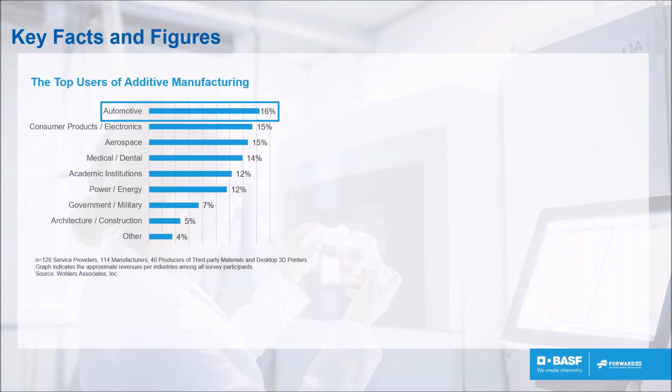So, a status report with some numbers. Let's start with this. You can see that based on the Wohlers report, the automotive industry is the top user of 3D printing. When you look at the right-hand side, you will directly understand why. The most fields of application for which additive manufacturing is suitable can be found in the automotive industry. So you have prototypes, proof of concept models, production aids like jigs and fixtures, but also mass production like end usage parts.

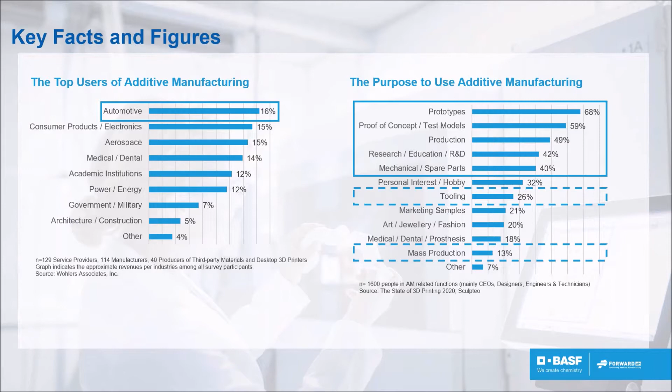So now you may ask how a chemistry company like BASF can help you use 3D printing efficiently. We as BASF Forward AM access the market from two sides to implement industrial 3D printing. First, the obvious point: BASF produces and sells materials. Because 3D printing is still a quite new field, we have to figure out customer requirements on the materials and find suitable material solutions. We support qualifying the products, go even into R&D to match requirements when the current portfolio cannot do the job, and we cooperate with printer manufacturers to ensure reliable part quality.

The second field is application development. We help our customers realize their 3D printing objects with our large 3D printing material portfolio, our expertise in virtual engineering, like the well-known BASF UltraSim tool, as well as the decades of experience from classical manufacturing from our mother company, combined with our 3D printing know-how.

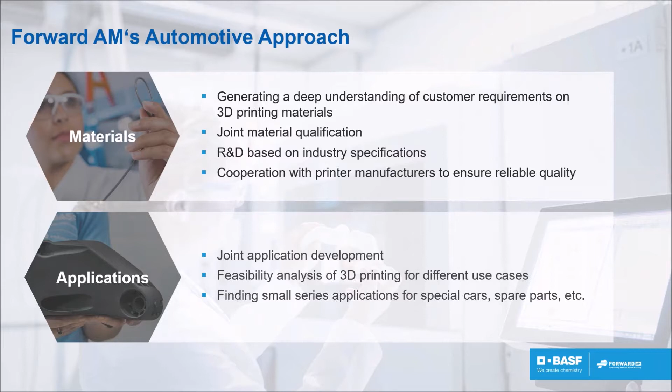When we focus on materials first, we can see here which plastics are already used for interior and exterior applications of a car. We can see a huge variety of different plastic materials. Now I want to show you for which plastic families we already have 3D printing materials in our portfolio—you can see these in the blue squares. Of course, when you focus on PA, for example, you have hundreds of different polyamide grades, and in 3D printing we might only have a dozen. But I would say it's already a good start.

And still, even if a part would be manufactured in injection molding in polyamide 6, for example, in 3D printing we would have to check if the 3D printing material is suitable for that, or we might go for another material for the same performance. Or what we could also do is a redesign to match the final part requirements. So again, that's why it's so important to understand the usage of the application.

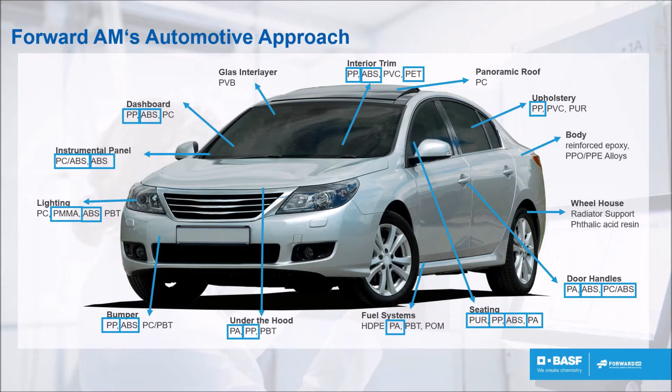We as BASF Forward AM are no printer hardware manufacturer, so we rely on the printers which are available in the market to process our materials. Within the printer manufacturer landscape, there are actually three different approaches to the market. These approaches are really important to understand, so you can figure out in which way and on which system you could process our materials.

First, we start with the open print systems on the left-hand side. There, it's easy to print our materials as long as the printer specs match the printing specs of our material. Two nice examples here are Farsoon for SLS, selective laser sintering, and Ultimaker for FFF, fused filament fabrication. But there are also way more manufacturers with open systems which we also work together with.

The second pillar is that we as a material manufacturer start strategic cooperations with printer manufacturers. You can especially recognize this when the materials are branded as enabled by Forward AM or enabled by BASF. Two nice examples are HP for multi-jet fusion, or EOS with selective laser sintering.

Last but not least, we have closed systems. Here the printer manufacturer is the only one selling materials for this printing system and also not doing any strategic cooperations. An example here would be the Stratasys printers. We unfortunately cannot access these printers with our materials at the moment.

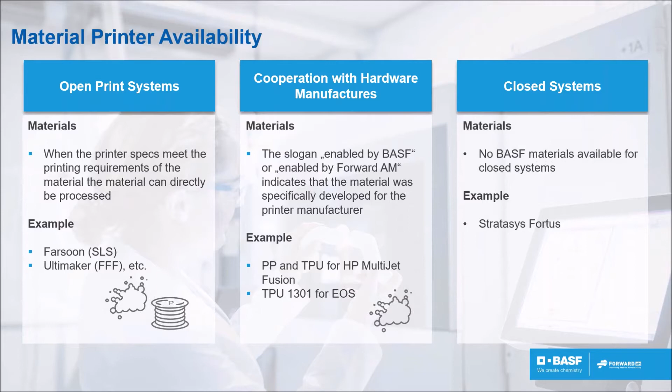So let's move from the pure material side to potential applications for the automotive industry. I have clustered these applications into prototypes, end-use applications, and jigs and fixtures for production. Additionally, you can see these batteries indicating the technology readiness level of each application.

Let's start with the prototypes first. I would say the oldest usage of 3D printing is actually rapid prototyping, especially for design and appearance models. Our most published use case is the one in the middle of the left-hand side: the engine bracket, which we developed together with Mercedes-Benz. The challenge here was how we can achieve the same properties as an injection molded part with a 3D printed one. Thanks to our virtual engineering colleagues and their UltraSim tool, we made it to solve this challenge.

We'll take a closer look at the two other use cases later on. For the end-use applications, you can see two yellow batteries. In this field, we see the highest challenges but also the highest potential for the future. Especially the yellow use cases will also be presented later.

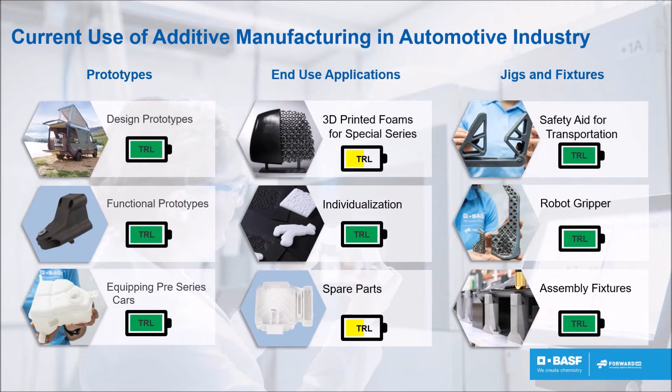Last but not least, we have the jigs and fixtures with all different kinds of production aids. Here, our metal filament is worth mentioning, since you can print easily and cost-effective parts on your desktop printer, send them to a debinding and sintering network, and then receive full metal parts printed in 316L stainless steel.

So now let's go a little bit more detailed into the use cases. Some of you may have heard of the cooperation between Hymer and BASF. At K-Fair last year, the so-called Vision Venture concept motorhome was presented. In this motorhome concept were over 100 3D printed parts. One of them was the side blade you can see here.

Especially when building up concept cars, you're struggling with producing the parts because it is lot size one, and of course there are no tools available. That's why 3D printing is really often used here. In most cases, the parts only have to look like the later series parts, but do not have to perform as them. In the past, the printing of these parts was often really expensive, and normally these parts do not fall ready off the printer.

With our materials printed on a Photocentric Magna LCD printer, we made it to decrease the prices to about half the cost in a comparable quality. When you think of this cost reduction for most of the printed parts used in a concept car, the overall savings are huge.

Moving from an appearance prototype to a functional one, the move to e-mobility comes with a huge challenge for the industry. BASF SE offers great solutions in this sector for injection molding.

Our colleagues at BASF Performance Materials contacted us about a solution for functional prototyping for inverter housings. And luckily we had one. Standardly, these inverter housings are made out of aluminium, but even though aluminium is a quite light metal, a plastic version is about 50% lighter. But using plastic results in another challenge.

The inverter housing has to shield electromagnetic radiation. To ensure this, the plastic part requires a metallic coating. There are a couple of technologies in the market for how to metal coat the plastic part. For the technology used here, a high temperature resistant plastic part was needed. This is actually no problem for injection molding parts or materials, but it's a challenge for 3D printed ones.

In 3D printing, widely used polyamide materials like PA11 or PA12 wouldn't survive the metal coating procedure. But our Ultrasint PA6 MF material made it. So our colleagues at Performance Materials had a nice prototype, which they could show around to customers to prove the whole concept.

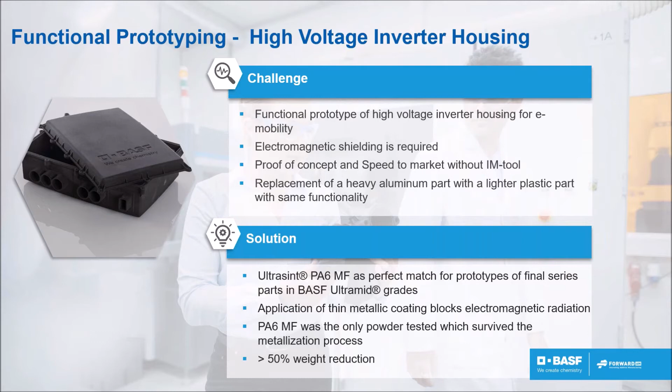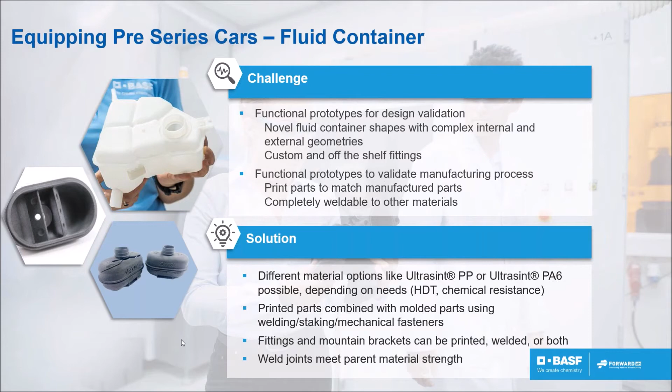On the next slide, we will look at an application that is particularly exciting, and I think probably the reason why a lot of us showed up today. It combines our printed TPU for the HP multi-jet fusion process and BASF's own UltraSim design service.

Ford came to us with a challenge to create a custom interior foam structure that can have tunable properties based on the needs of the model or submodel. They wanted to be able to drill down even further on individual responses based on where the part would be in the cabin, and to do that all with lightweight and an open design that enabled comfort heating and comfort cooling as well.

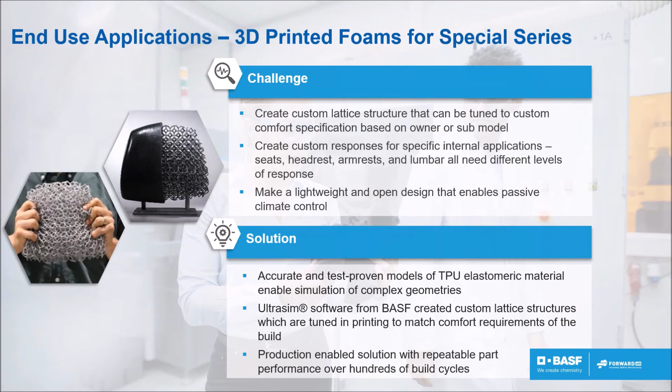Our test-proven models of the TPU material enabled UltraSim to accurately predict material behavior and create custom lattice structures tuned to match the desired performance, even tuning performance to individual areas of the part itself. Our TPU is also very unique for the MJF platform in that it maintains mechanical properties over many build cycles in the MJF process. This enables production level solutions.

This part was also very interesting as we walked through the process with production in mind. To create a part for the cabin, the material itself has to pass a battery of tests. The emissions of the material is an especially crucial factor—we don't want to breathe toxic gases or be surrounded by bad smells.

Together with our partner Oechsler, we started investigations into our Ultrasint TPU material and its suitability for interiors. Together we figured out that yes, it is suitable.

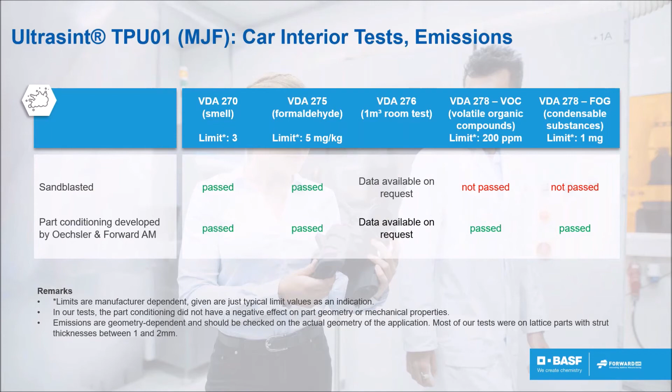Another piece of the car's interior is color, right? And so we've proven out the test cases for outgassing, and we're working on mechanical stability, and now we turn our attention to color. With polyamides, usually you would dye the part to get good colors.

With TPU parts, and especially gray TPU parts, that solution doesn't work for many of the desired colors. So we have developed, together with BASF Coatings, a special flexible spray coating for 3D printed parts. This coating is available in 4 different standard colors, and any other color can easily be developed on request. This coating has great adhesion to the printed part and behaves exactly like the part.

The 3D printed part in TPU and the coating pass the Rossflex test. This means that the part gets a cut and then it gets flexed and bent over 100,000 cycles. When the cut stays as small as it was before the test started, the test passed.

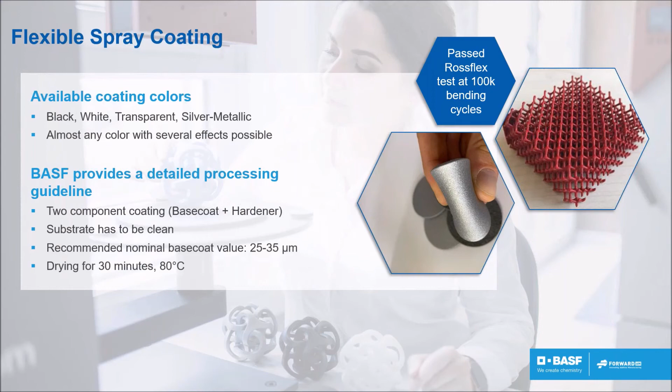On the next slide, we'll see an example from our strategic partner in the US, Extol. They specialize in creating unique ways to empower the plastics industry. One of their key products is a unique heat staking process called NanoStake.

For this fast and efficient process, precise work holding tools are critical for repeatability and for protecting the finished parts as they're being assembled. Extol have begun printing the mating surface of their work holding tools, what they call soft touch tooling, out of the BASF TPU. This replaces a urethane molding process and significantly reduces the time investment needed for a new project.

It also lets them empower fast design changes for their customers. As we understand it, one design change iteration with printed tooling can save them $10,000 over previous methods. So that's a significant savings and a really neat prove out for soft touch tooling.

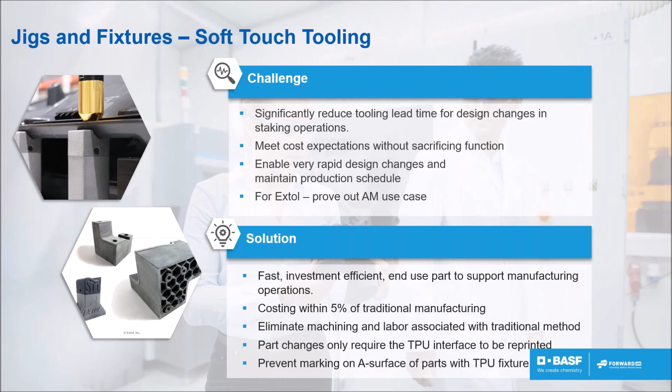Another interesting prove out has been with General Motors. GM has developed this application for printed polypropylene. They have a need to make available to the market a recall part for mid-90s pickup trucks. They expect to sell very few of these parts annually, but due to regulatory concerns, the part must be available.

In the past, this part would have been designed and manufactured with a tool cost we estimate above $20,000 and a minimum order quantity in the hundreds at least. With a printed solution, GM has the part available for their dealers, but in digital form. So the part can be printed on demand and sent directly to the dealer for the needed repairs. GM is using this to prove out the viability of their digital inventory idea as they continue to grow in adoption of additive manufacturing technologies.

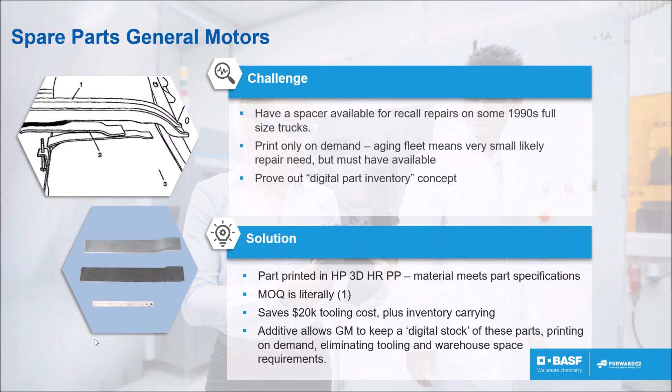Now, BASF is developing a solution to empower manufacturers to efficiently handle digital spare parts as well. Christian, would you please take us through that?

Thanks, Jeremy. What you also could see in the General Motors use case is that even a long time after the last car rolled out of the production hall, the spare parts for it have to be available. This causes, of course, extremely high costs and effort in warehouse and after-sales management. One possible approach is, like GM did, to switch from a physical to a digital warehouse.

And this is where Replique comes onto the table. Replique is another BASF startup, and they are focusing on how 3D printed spare parts can be manufactured decentralized by pre-qualified partners, while ensuring that the partners cannot reproduce or copy the printouts illegally.

This software solution can be customized to exact needs and integrated into essentially every IT infrastructure. So it would be suitable for automotive, but also for other industries where spare parts have to be available a long time after a product runs out of actual production.

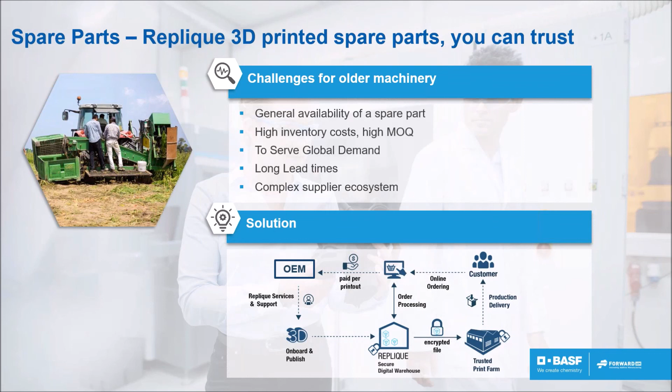So I hope that we could give you some interesting insights into 3D printing in the automotive industry, and you hopefully can connect these to your own challenges which you're facing at the moment.